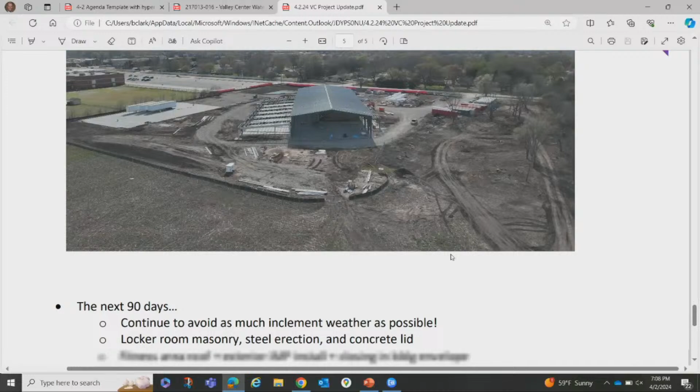If you look at that picture, on the far side is where we will be digging the pool, so that's a big milestone we'll be starting here. Jairus touched on, we're doing the liner panels on the inside. That's to allow us to get inside, have some of that work done, and then start digging out in that area. We're starting layout next week, so that we'll get in there and start digging all that stuff out.

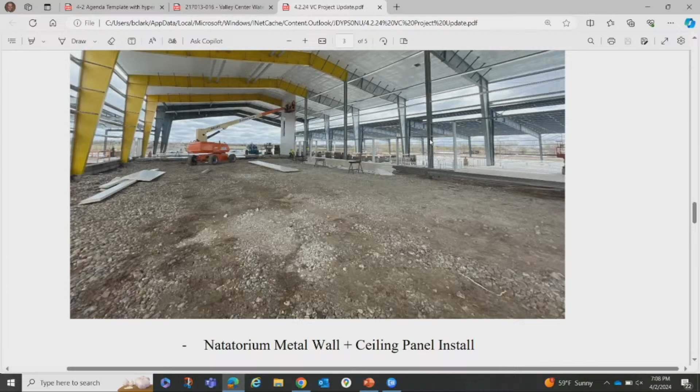As far as on this site, we also have on the other side the fitness roof. So really our main focus and critical path is that pool area, and we're seeing the rest of the building progress along with that being our main area in the pool. In that fitness area, you're going to see that going up fairly quickly with the pool being our pinch point. You'll start to see in-wall rough-in, overhead rough-in, and then you'll really start to see some of the framing come along.

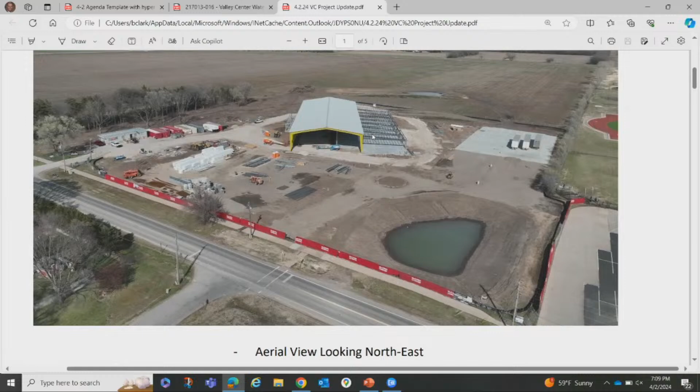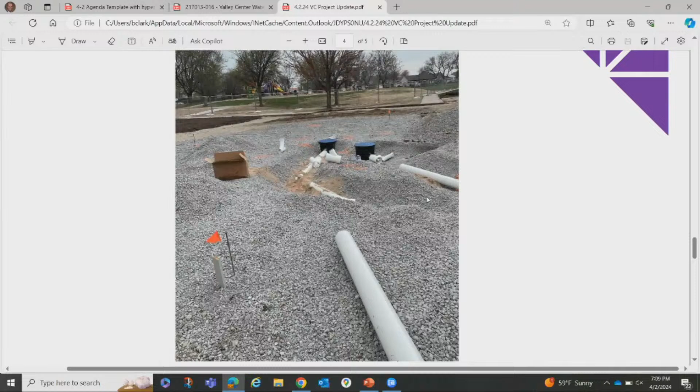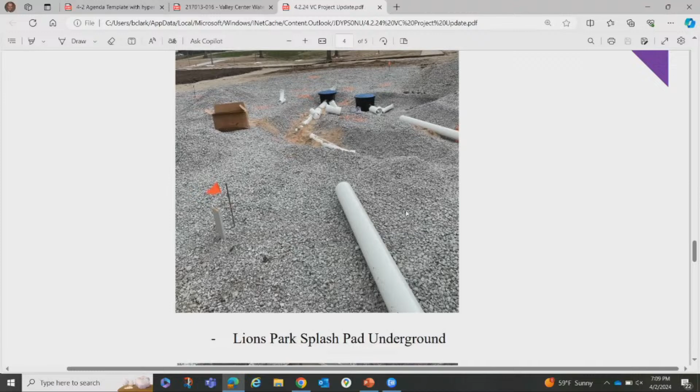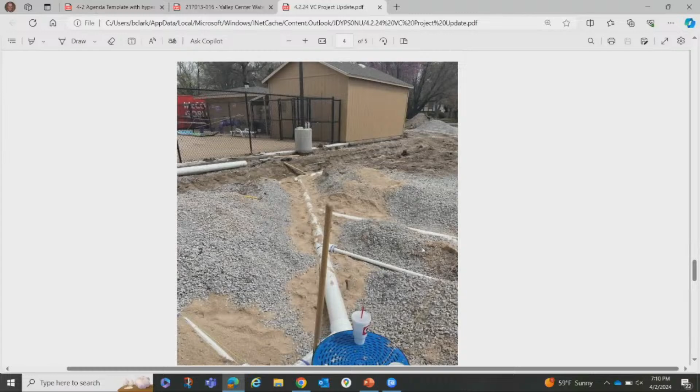The splash pad at Lions Park, we're on track for that one to open Memorial Day. That was a very big thing that Brent talked to us about, making sure that was open, so we're on path to do that and doing everything we can to make sure that happens. I'm very happy with our progress - we've been able to progress along really well, even though it was a pretty tough winter with some of the weather and delays. We've actually brought that back, and we don't see that impacting the project up to this point. So appreciate it.

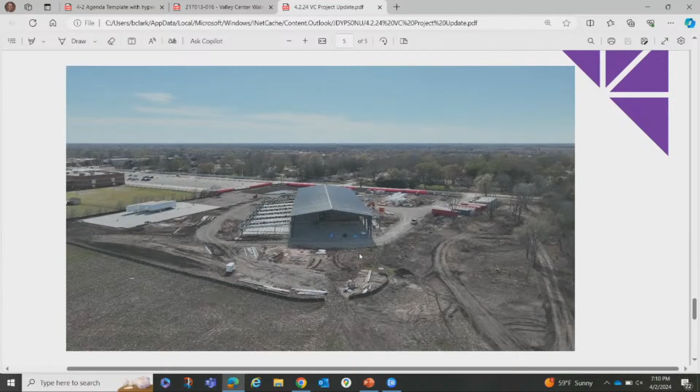So you're on schedule, okay, that's great. We have, so I want to give credit where credit is due, and these two have worked their tails off. To date, we've lost 39 working days, about 5 days in a working week, so we've lost almost 8 weeks of time. We've resequenced some things in the schedule, doing some things a little later than we had originally anticipated in the work sequence, but we're still maintaining that open facility by the beginning of the year. So we've been able to do that without moving the final date of the project essentially 2 months. These two have worked their tails off, and they deserve the credit on that.

So that was a really long-winded answer to say yes. That's fine.

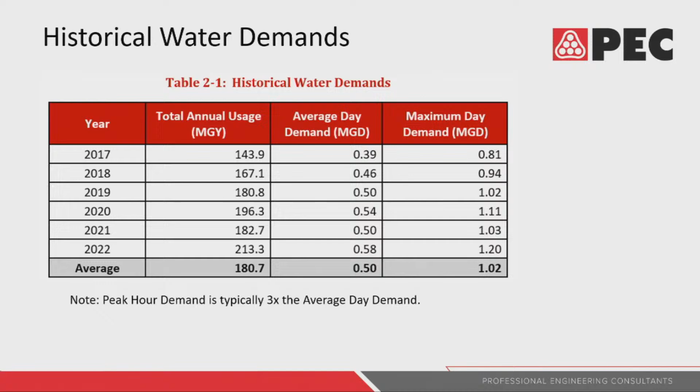At this point we were able to develop a water model for the city based on the city's GIS, and we were able to calibrate that. During calibration, we found a few closed valves in the city's system, particularly on the east side, which contributed to lower pressures. We notified the city, and they've opened them since and have seen improved pressures.

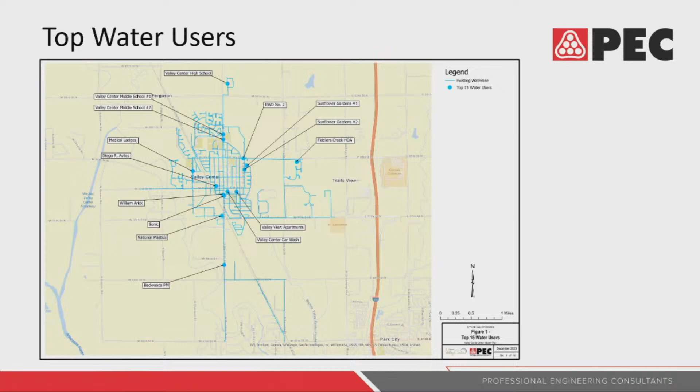It's important to note that the state requires all system pressures in the water distribution system to be above 20 psi. So even at 40 psi in the east part of the city, you're still meeting state regulations, so nothing to worry about there.

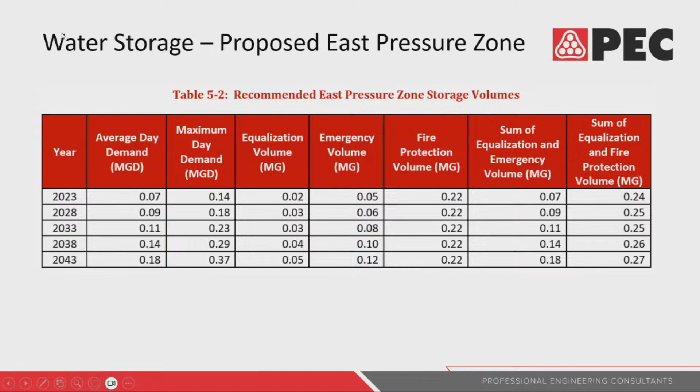So going back to total system storage, you have your existing 750,000 gallon water tower, plus the 200,000 gallon water tower we're proposing, giving you 950,000 gallons of total storage, which is adequate based on this.

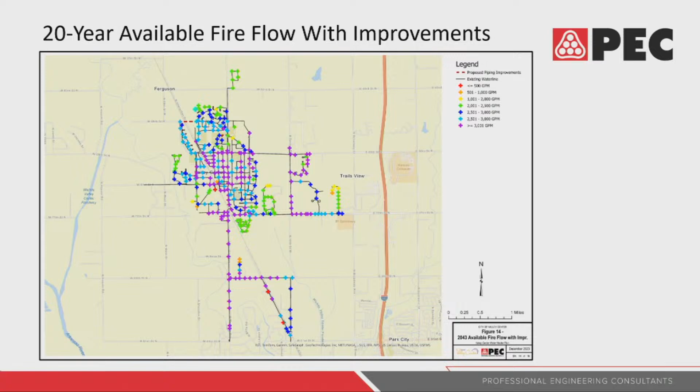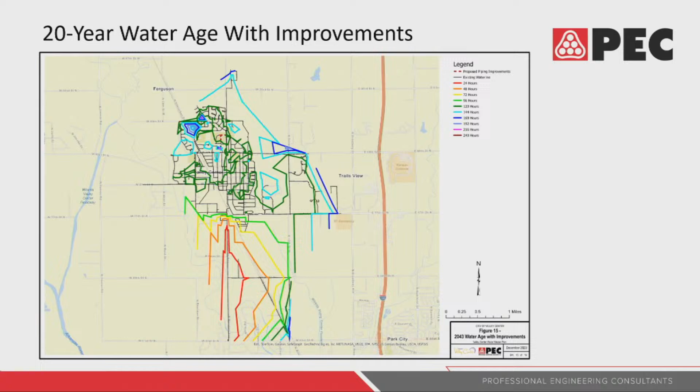It also may be beneficial for the city to install a mixer in their existing tower, and that's just to help sustain more adequate water age in the system.

So that comes out to a total project cost of 4.3 to 4.4. FYI.

Dan, you have a question? I'll let Dale. Dale was first. Oh, I was gonna let Mr. Anderson go first. Go ahead.

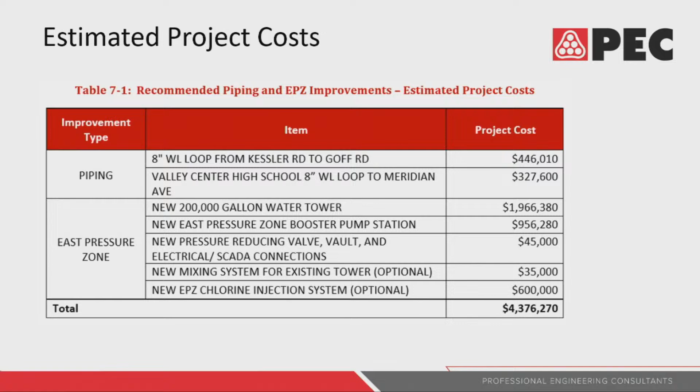Okay, can you go back to your slide where you had your boundary, red boundary? Yeah. All right, so on that map, I assume in your projections that there's a lot more housing developments going in on both sides of your map. Okay. Yes. Now, what I don't understand with the hydrology and all the piping is, actually, where your cursor was on the other side, right there is going to be a big development, and then we're going to have another one up there by the high school. How is that going to affect our pressures up there?

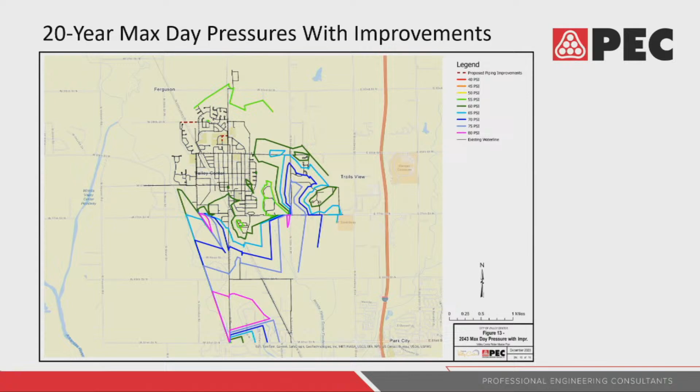Yeah, so all of those demands in the growth areas were included in that 20-year projection. So the results that we're seeing from the 20-year projection and those pressures account for that increase in demand and growth. We didn't identify that those had a significant effect on pressures on potentially what would be the east side to the lower pressure.

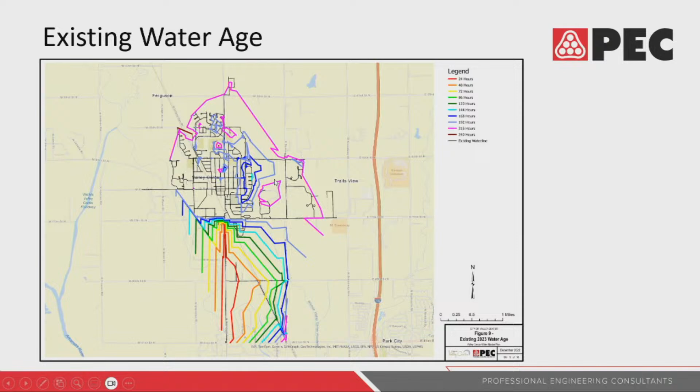Okay, because there's also the two on the east side that are also newer housing developments that would probably affect it more. Yeah. Oh, is that what that red area is? Okay.

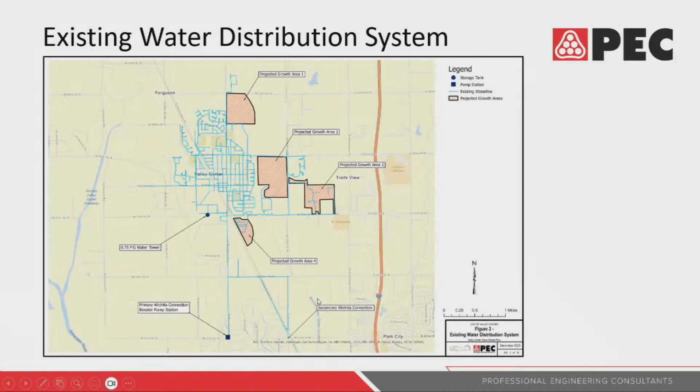Yeah, I got a few questions for you. The proposed water tower and boost station—the water tower was at 85th and Seneca, and the boost station's at 77th and Seneca. Are those, do those have to be installed at the same time? Do those work together, or do you need both of them at the same time, correct?

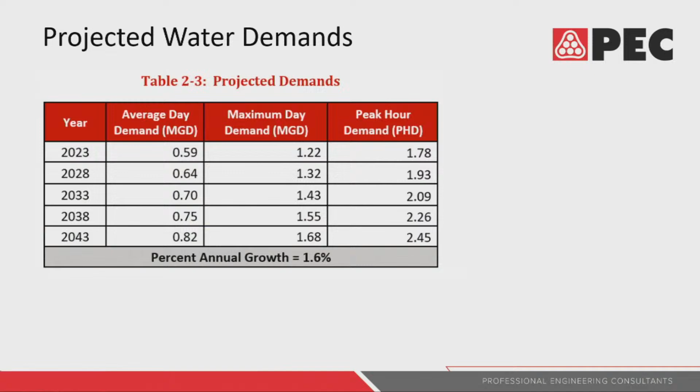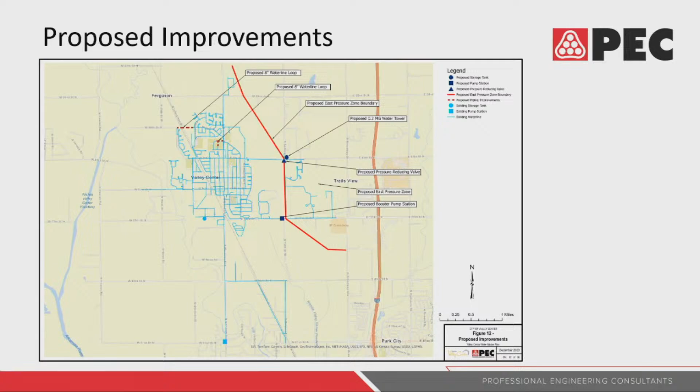Yeah. Okay. That's how you technically can do pressure zones without towers. That means your pumps have to pump the instantaneous demand all the time. And that's usually not the preferred method. As Lansing kind of talked about, the tower adds storage benefits—without that, you're kind of lacking that. Wichita operates like that; they have very few towers at all. What that kind of causes is their system is very reactive. So when they have breaks and things like that, their system reacts much quicker, usually for the worse, to those scenarios. Towers just really stabilize the system.

According to projections, do we have a time frame of when those would need to be installed to maintain our pressures? So I know it's all fluid. Well, no pun intended, it's pretty fluid with the number of houses we add. Do you guys have a projection though, based on our growth, when we would need to?

Yeah, I'll see if Lansing remembers the number, but I do know even without the East Zone improvements, the 20-year projections, we're still meeting the KDHE requirements. Do you recall what the pressures dropped to? Maybe mid-30s? Yeah, so maybe it goes from the 40 down to the mid-30s. Okay, so that's still in KDHE compliance. I will say that people would likely be complaining about pressures if they're at that point.

And then, as far as that's kind of the range, in the 20 years, pressures are slowly going to drop as growth happens. The exact range—we do 5, 10, 15-year increments, but we're just evenly dividing that. It all depends on how growth actually occurs. And that's what I was getting at, is we need to start looking at that for 20 years down the road. This is an expenditure we're going to need to come up with so we can plan, and it doesn't sneak up on us and we have to scramble to try to find the money for those.

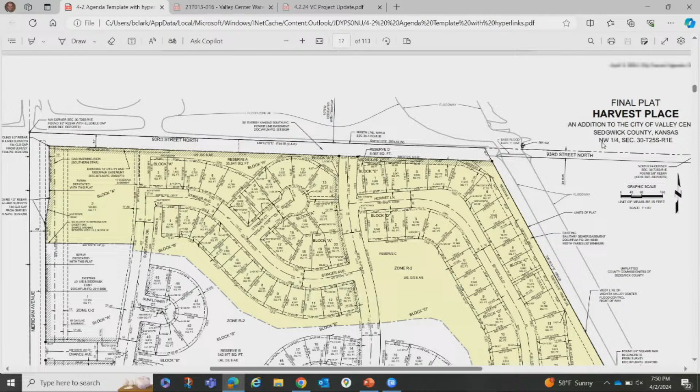Resolution 751-24, drainage improvements. I make a motion to adopt resolution 751-24, authorizing construction and financing drainage improvements to the Harvest Place subdivision. Second. Have a motion and a second to approve resolution 751-24, the drainage improvements, Harvest Place. Any further discussion? All in favor of the motion, signify by raising your right hand. All opposed, same sign. Motion carried.

Moving on to resolution 752-24, the paving improvements. Move to adopt resolution 752-24, authorizing construction and financing paving improvements to the Harvest Place subdivision. Second. Have a motion and a second to approve resolution 752-24, paving improvements in Harvest Place. Any further discussion? All in favor of the motion, signify by raising your right hand. All opposed, same sign. Motion carried.

Moving on to resolution 753-24, sanitary sewer improvements for Harvest Place. I move to adopt resolution 753-24, authorizing construction and financing sanitary sewer improvements to the Harvest Place subdivision. Second. Have a motion and a second to approve the motion. Any further discussion? All in favor, signify by raising your right hand. All opposed, same sign. Motion carried.

Moving on to resolution 754-24, the water improvements for Harvest Place. Make a motion to adopt resolution 754-24, authorizing construction and financing water improvements to the Harvest Place subdivision. Second. Have a motion and a second to approve resolution 754-24, water improvements. Any further discussion? All in favor of the motion, signify by raising your right hand. All opposed, same sign. Motion carried.

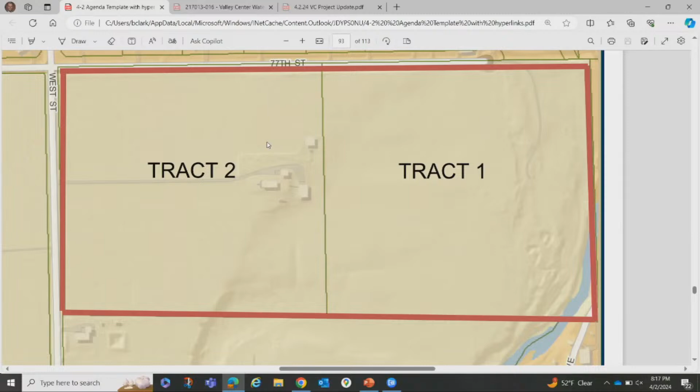On these two tracts, these two roughly 39, 38 acres - so I call them 40s - the landowner has requested to be voluntarily annexed into the city. Now we did receive, and the reason for the waiver... the reason for the waiver of the first reading and moving right into the second reading and adoption is we actually already received a preliminary plat on this parcel, or on these two parcels.

The developer really wants to get moving forward with finalizing the plat documents and be able to be placed on the planning and zoning agenda for April this month to be heard. We do have one of the developers with us in the audience if you have any questions. But the property owner, as you see on that signed letter request, has requested annexation. It is adjacent to and contiguous to our corporate limits, so it's a much simpler process than our most recent one.

Dan, any questions? Yep - the plans for this property, do they involve needing water and sewer from the city? Currently on the preliminary plat, they have requested to explore advanced septic systems as well as wells, drinking wells. Now, of course, that's always up for discussion that we will have throughout the course of the project.

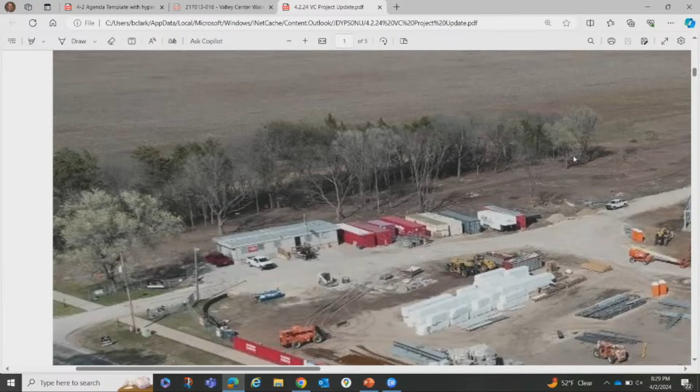We're not professional tree removers, but we've pulled together and done a lot of good things out there. Compared to that picture, there were a lot more trees than there are now. We've also worked to clean it up and make it more aesthetically pleasing when you look to the north once the whole facility is done. That tree row will generally still remain intact to serve as a windbreak. Don't know how long it's going to stay there - at some point it may change, since that's kind of a blank slate to the north. But right now we're just trying to improve that area as part of the project. I wanted to mention that since we're talking updates on the rec and athletics.

Good evening again. I regret I don't have updated pictures of the Meridian project. The project keeps moving forward. If you've been up and down that street, there's a great deal of concrete pipe and concrete structures - they keep digging really big holes and putting a lot of concrete in the ground, despite it being an older part of town and all the things we keep finding in the ground that we have to work around.

They have storm work done on the east side, almost to 2nd Street now. Right now they've switched over to working and installing services on the new water line from 2nd to 5th. They're working diligently on that and hope to have all those services in by the end of the week.